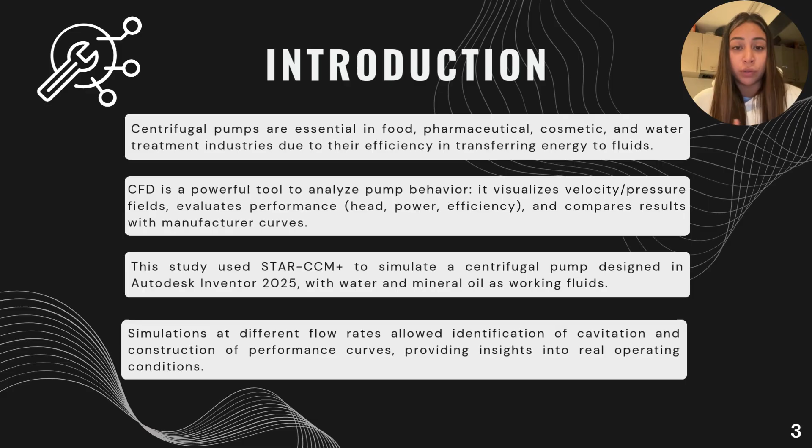It allows us to visualize velocity and pressure fields inside the pump, calculate performance metrics such as head, power, and efficiency. In this project, we use STAR-CCM+ to simulate a centrifugal pump designed in Autodesk Inventor, in which two fluids were tested, water and mineral oil.

In the literature, several key aspects guided our study. So, first, pump design theory based on classical turbomachinery concepts such as velocity triangles and Euler's equation was applied to define the impeller and volute geometry.

Second, previous works like Valdés et al. provide best practices for CFD validation, including comparison with manufacturer data using error metrics. Third, polyhedral meshing with prism layers was highlighted as the most efficient method for accurate boundary layer resolution.

We also found that the viscosity strongly impacts pump performance, reducing efficiency and shifting the best efficiency point. Finally, direct cavitation analysis using total pressure thresholding was identified as a powerful technique to detect cavitation zones with precision.

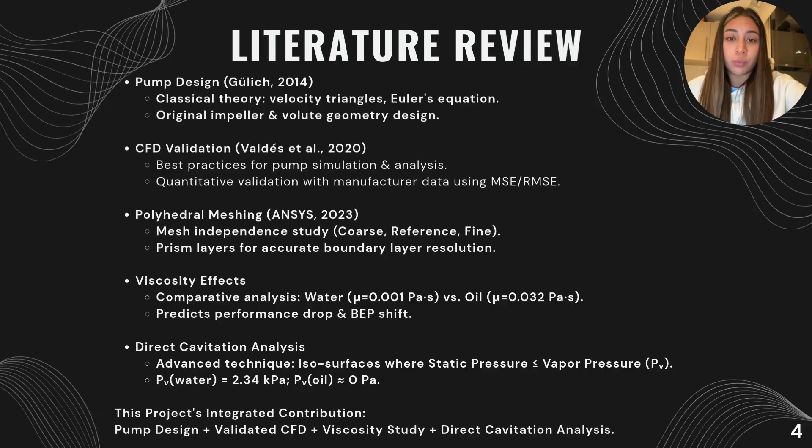Well, so for the development of this CFD study, we used several key resources. First, Autodesk Inventor was employed to design the pump geometry, including the impeller and volute following the required dimensions. Second, the CFD simulations were carried out in STAR-CCM+, where the mesh, physical setup and numerical analysis were performed.

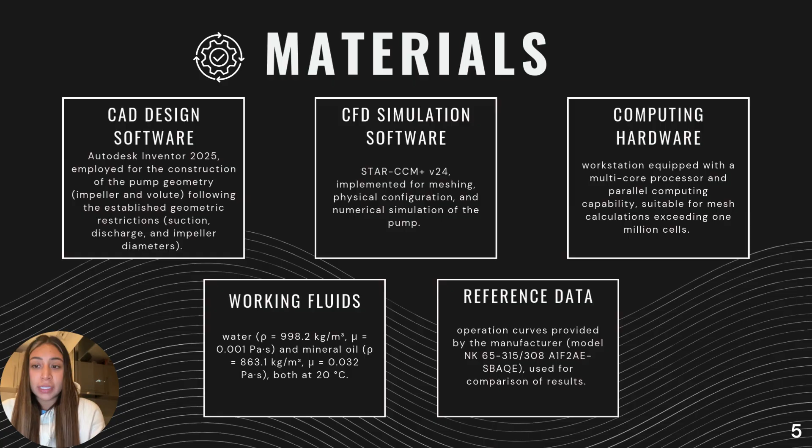We also use a workstation with a multi-core processor and parallel computing, which allowed us to handle meshes with more than 1 million cells. As working fluids, we select water and mineral oil at 20 degrees Celsius since they provide a good contrast in density and viscosity. And finally, manufacturer operation curves were used as reference data to validate and compare the results of our simulations.

In this study, the pump geometry, including the impeller, volute, and rotation region, was designed from scratch in Autodesk Inventor and then imported into STAR-CCM+ for meshing and simulation. We test three mesh configurations: coarse, fine, and a reference mesh of about 1 million cells using polyhedral elements with prism layers to ensure a good balance between accuracy and computational cost.

The reference mesh was selected after a mesh independence study at the best efficiency point. In total, 10 simulations were performed, 5 with water and 5 with mineral oil, at different flow rates, including shut-off, intermediate, best efficiency point, and free delivery.

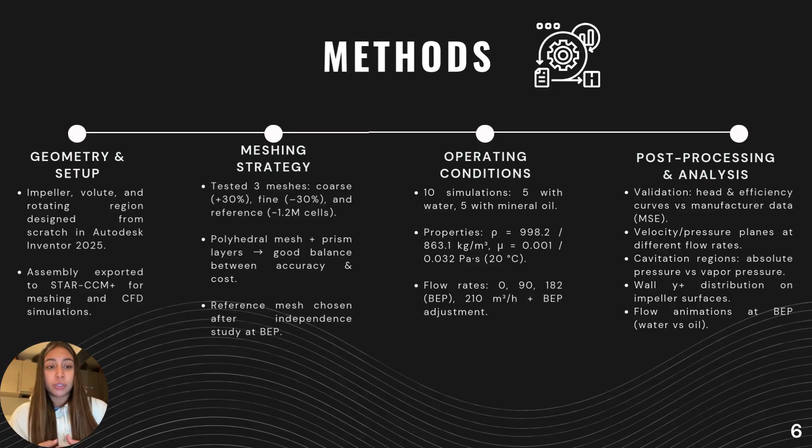Finally, post-processing, including validation of performance curves against manufacturer data, visualization of velocity and pressure fields, cavitation analysis, wall y+ distribution on the impeller, and flow animations to illustrate pump behavior under real operating conditions.

This significant performance drop is directly attributed to the higher frictional losses associated with the oil's high viscosity, which dissipates a substantial portion of the energy imparted by the impeller. The maximum efficiency with water reached 65% at 170 cubic meters per hour (BEP).

For the oil, the maximum efficiency did not exceed 60%, and the BEP shifted to a lower flow rate. This shift and reduction are typical phenomena when pumping viscous fluids, as frictional losses alter the system's optimal operating point.

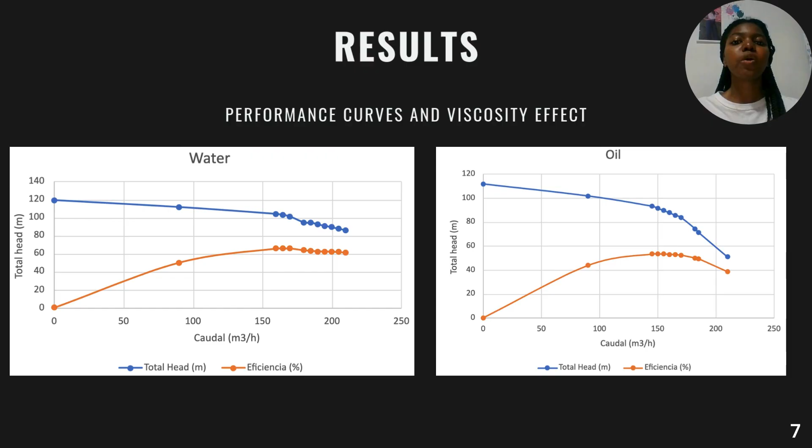To validate the accuracy of the CFD model, the results obtained for water were quantitatively compared to the manufacturer's experimental data using the mean square error and root mean square error. The RMSE value represents a deviation of 6.35% from the maximum head and 8.04% from the minimum head. This error below 16% falls within acceptable limits for centrifugal pump CFD simulations and validates the model reliability in predicting hydraulic performance.

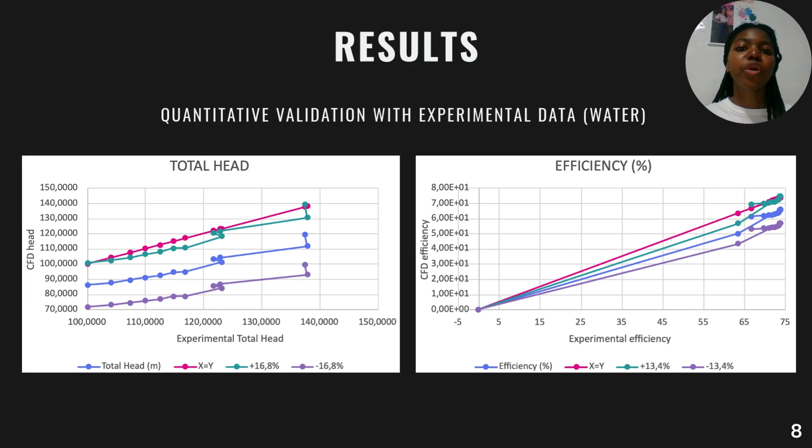The error band of ±13.4% for efficiency indicates acceptable accuracy in predicting this parameter, which is inherently more complex to calculate due to its dependence on torque and mechanical losses.

Cavitation was analyzed by post-processing the CFD results to show areas where the absolute static pressure was lower than the vapor pressure on the plate. For water, vapor pressure is 2340. The results show a small and solid spot on the suction side of the impeller blades, where the pressure dropped below 2340. This is clear visual evidence of early cavitation. Under these operating conditions, since the low pressure zones were small and localized, the cavitation is only beginning.

For mineral oil, vapor pressure is like zero. The results show some pressure values significantly below zero. Really negative absolute pressure is not possible. These values are likely numerical errors in the simulation caused by things such as poor quality cells in regions with strong flow gradients, convergence error in the pressure calculation, and solver pressure limits when pressure values are very close to zero.

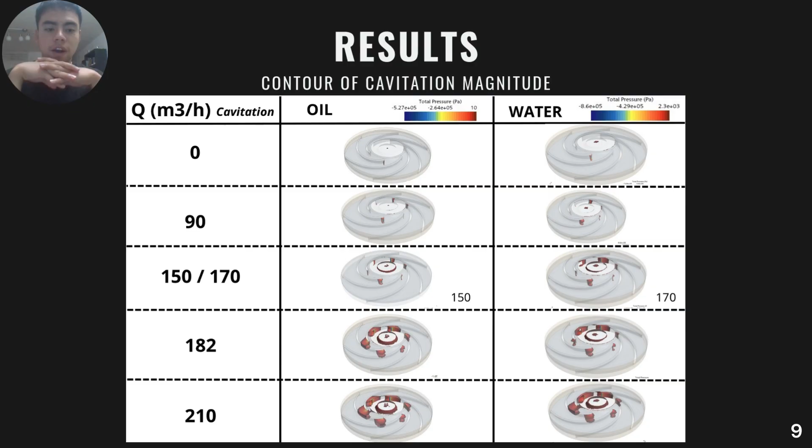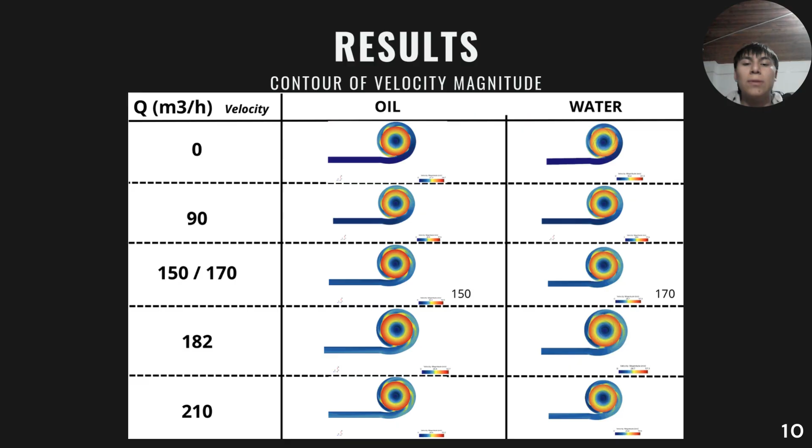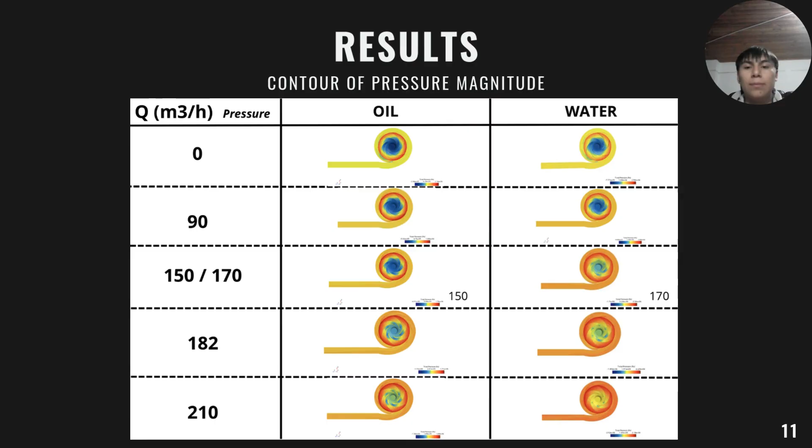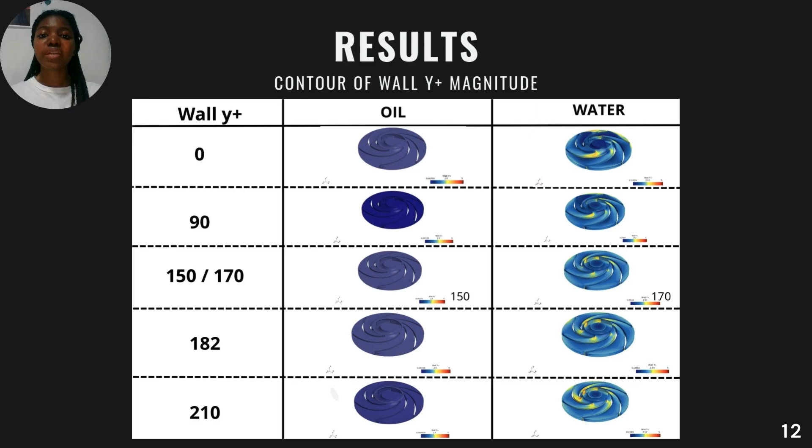The wall y plus is a key parameter in CFD that tells us how well our simulation captures the flow right next to the pump walls. In all our simulations, the y plus values were consistently below 5 for both water and oil across all flow rates. This is ideal. It means our model accurately resolved the thin boundary layer, which is important for reliably predicting friction losses and pump efficiency. We also saw the expected trends. Y plus increased with flow rate due to higher shear stress, and it was lower for the more viscous oil, which confirmed our CFD setup correctly responded to the physics of different fluids.

In this project, we applied CFD to study the performance of a centrifugal pump using water and mineral oil as working fluids. With water, the pump followed the expected performance curves, reaching its best efficiency point close to 170 cubic meters per hour. In contrast, with oil the head dropped by almost 40% and the best efficiency point shifted to a lower flow rate, showing how viscosity strongly affects pump behavior.

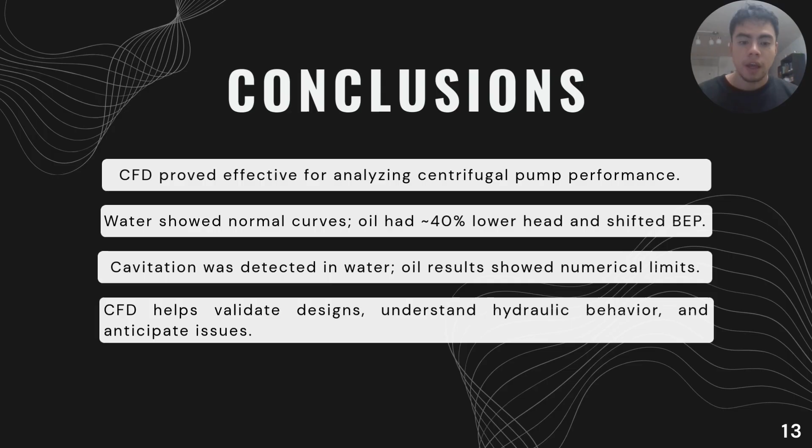We also analyzed cavitation. For water, small low-pressure zones on the suction side of the impeller indicate the beginning of cavitation, while for oil, the results show negative pressures, which were numerical effects. Overall, CFD proved to be a powerful tool to validate pump performance, understand internal hydraulic behaviors, and anticipate problems such as cavitation without relying only on physical testing.